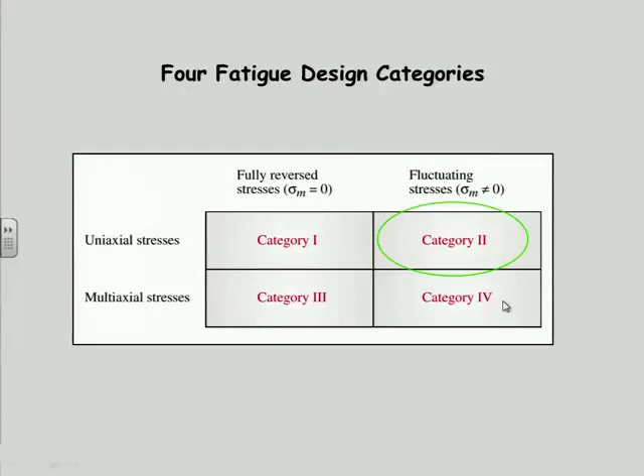When I have something other than fully reversed stress in a fatigue situation, then I will have a value of mean stress, a non-zero mean stress. There's lots of test data that show that the combination of both alternating and mean stress is more dangerous and debilitating to the material than just the fully reversed stress itself. And that's bad enough, because we've already discovered that your allowable strength, the usable strength of a material, is on the order of a fourth to a third of its advertised ultimate tensile strength. And when we get through with all the factors for endurance strength, we find we're down around 25 to 30% of the number we started with.

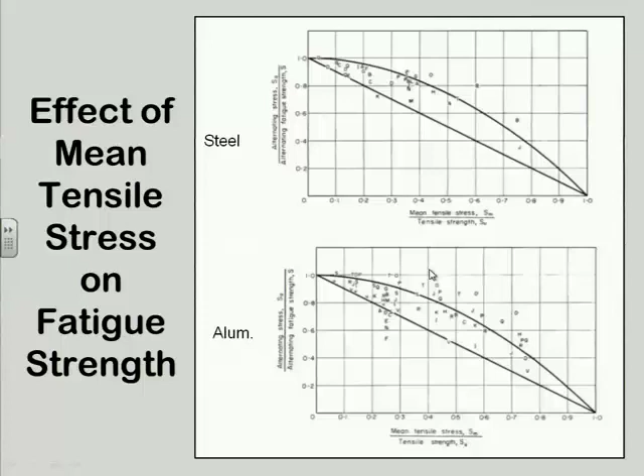Now, we've talked before about the positive effect of compressive residual stress on the fatigue case, because it tends to close the cracks. It raises the threshold, we have to get the tensile up above that threshold before it really is seen by the part, and all that good stuff.

This now shows test data, actual test failure points for aluminum and steel both. There's supposed to be a difference in appearance, but I don't see it. Aluminum, they both are circles. I think one is supposed to be a fatter line, but it doesn't show up very well on this plot. So some of these are aluminum, some are steel, all mixed in together.

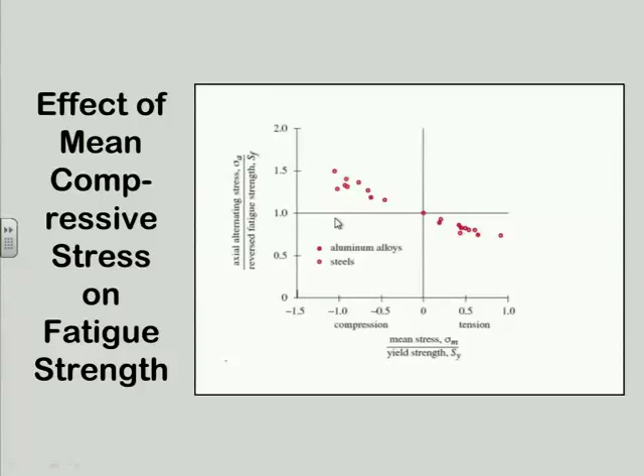So you could continue that Goodman line back into the compressive regime, because you might have mean compressive stress, and you might even have some alternating compressive stress in a given situation. But because engineers are inherently conservative, we don't take advantage of that, and we run the line across at the endurance limit. That'll come up in another slide in a moment, too.

So this shows the Gerber parabola that we just saw sitting on a bunch of test data. The Goodman line is pretty much underneath most of those breakpoints. There were a few that were below the Goodman line. In the aluminum, there were quite a few, in fact, which is again why we have to use safety factors.

Mr. Soderberg must have been extremely conservative, because note that the Goodman line simply connects the fatigue strength or the endurance strength, and whether it's endurance strength or fatigue strength is dictated by the type of material. We don't talk about an endurance strength for aluminum, because it never levels out, so we talk about its fatigue strength, using the subscript F for that. And if you're talking about a lifetime less than 1 million cycles, say only requiring the thing to last 100,000 cycles, then you could back up the SN diagram and get a larger value for fatigue strength than the endurance strength, because they don't care about going to 1 million cycles. So that's the difference between the E and the F.

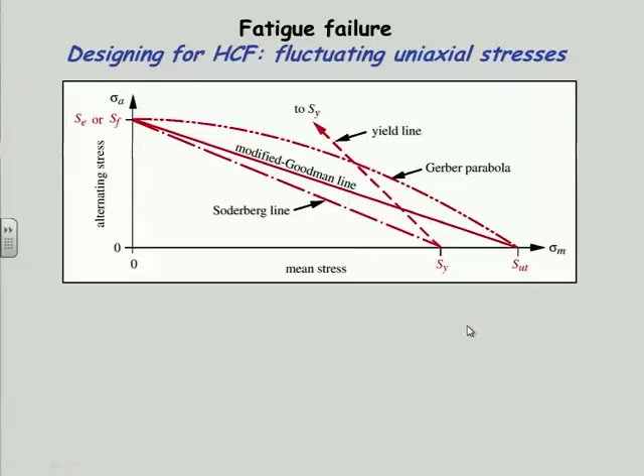There weren't as many data available that long ago on this phenomenon. So I think nowadays the Goodman line is sort of it. But you can use any one of them, and you'll find different books will stress different ones.

We can write equations for these lines very easily. I mean, you know how a parabola is just a squared term equation. This is in terms of alternating strength, S sub A, just a generic term for alternating strength—a stand-in for either S sub F or S sub E. It's just a generalized alternating strength.

Endurance limit times 1 minus sigma m squared. Now sigma would be your applied stress level in the mean direction, divided by sigma ut squared, that's the ultimate tensile strength. And that fits the experimental data very well.

The Goodman line is a linear line, so it's the first power, a similar expression: 1 minus sigma m over sigma ut. And the Soderberg line puts sigma y in instead of sigma ut. So we can use any one of those three as our reference.

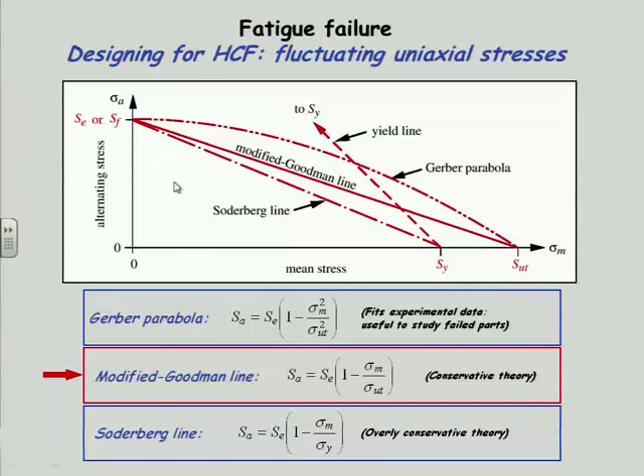Before I leave that slide: if my combination of alternating stress and mean stress is within these envelopes, whichever one you want to pick, then you say that's safe. Because when you reach the line, that's defined as failure for the Soderberg theory, the Goodman theory, or the Gerber theory. So on or outside the line is failure. You want to try to keep your stresses inside by some comfort factor, which is our safety factor.

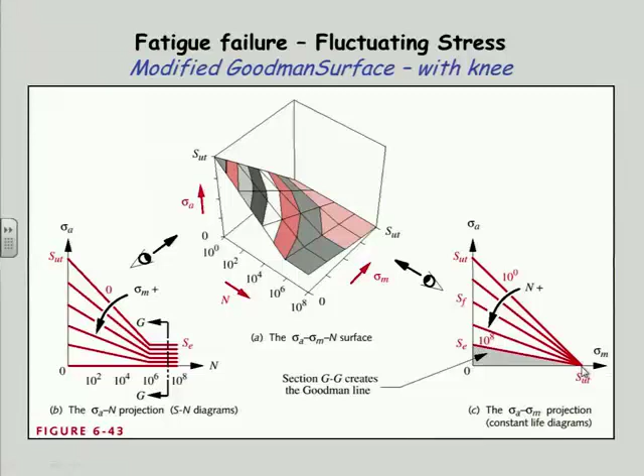The data shows that it continues more or less at the same slope back into the compressive regime, but we, being conservative, say we'll just level that off. And we could have yielding in the compressive direction as well, so that puts a limit there. And here's our Goodman line going off to SUT from the endurance or fatigue strength. So the gray area is our safe zone.

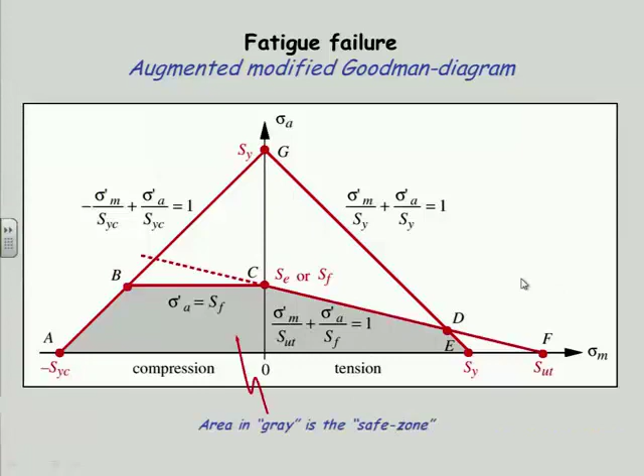And again, we're going to have to calculate a value for sigma A and sigma M separately—same equations, but you'll have different forces, because you may have a different value for alternating and mean in a given case. And find out where we are in this gray area here. And then we will determine a safety factor based on the relationship to that line.

Now we have to deal with stress concentration again, and it becomes a little more complicated when we add in the mean stress. Let me hark back to something I said when we started talking about static stresses, because it's applicable here too. It's generally believed that if you have only static loading and ductile materials, you can pretty much ignore stress concentrations because they self-correct.

Locally in the notch, the material will yield. And when it yields, the stress comes down to the yield stress. It can't go above it anymore because the material has moved, it has taken a set locally. So it's somewhat self-healing. If I only put that static load on once, the first time I put the load on, the thing yields, and it no longer hurts. If I do nothing else except leave that load on, I should be okay.

But if I start to cycle that load, that's a whole new can of worms. Now I'm going to have to worry about that stress concentration, even though the material is ductile. So in this new situation with fluctuating stress, we have both mean loads and alternating loads.

If you want to be really conservative, you could calculate the stress concentration factor like we did in the last round of discussion. We take the K sub T out of one of Peterson's tables, like you did on the quiz yesterday, and factor that down based on the notch sensitivity of the material. If the material isn't very sensitive to notch, I can reduce that number a little bit. I call that K sub F, the fatigue stress concentration factor.

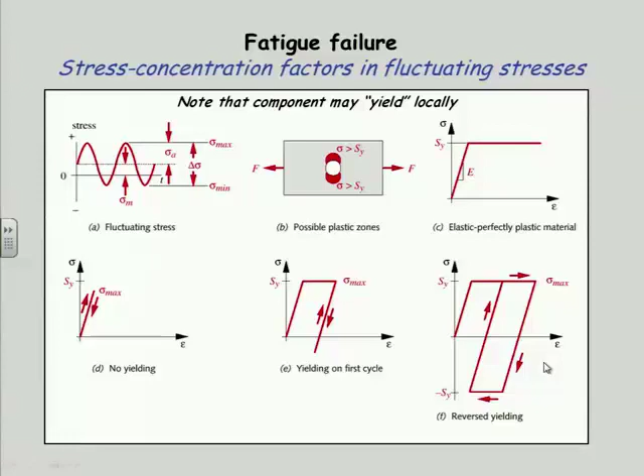And if I plot these three regimes, this axis is the maximum value of stress. And right here, this dotted line represents the value of SY divided by KF. We're going to apply the KF to the calculation because we have the stress. We know we have a stress concentration, and I want to know, does that stress in the stress concentration yield the part locally? So I'm going to multiply the maximum stress by K sub F and compare that to the yield strength. Did I yield at the end of the crack? That's the question.

If I don't, then I'm going to use the full KF for KFM because I never yielded. But if I start to yield it, then I'm going to work this down until I get to twice SY, which means that I'm exceeding it at both ends—I now in effect have a fully reversed case, and I'll knock it down to zero.

So while I'm in this regime here, Dowling, I think, came up with this equation. I'm not sure if it's original with him, but I first encountered it in his work, so I'll give him credit. We take the yield strength and we look at the alternating stress and the absolute value of the mean stress, multiply that by K sub F, and that will become our K sub FM.

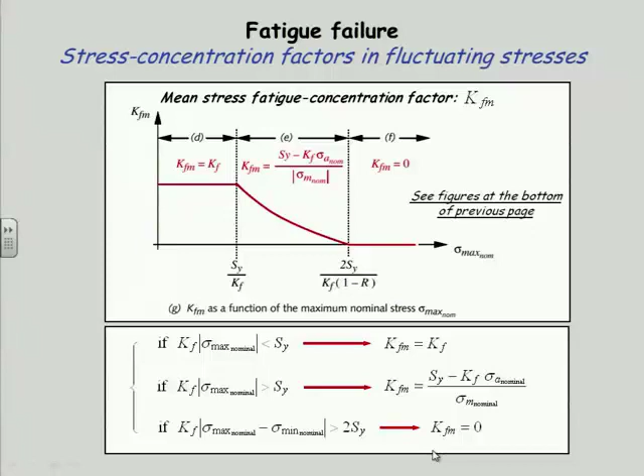So this is just a summation of what I said. If Kf times the maximum nominal stress is less than Sy, I use the entire amount of K sub f for Kfm. If it's greater than Sy, then I have yielded locally in the notch, and I use this funny formula. And if it's greater than 2 times Sy, then I say I've clipped it on top and bottom, and my mean stress is effectively gone.

So now the question is, how do we figure out a safety factor? I hope you understand that we have this envelope, right? From your side, alternating stress here, mean stress here, Goodman line coming down, yield line over in the corner. Goodman line is the primary one, and we're at some point in there, some sigma A, some sigma M. We're sitting someplace in the gray zone, so we're safe. How safe are we is the question.

Well, it turns out there are 4 possibilities. I call them case 1 through 4. And which one you have depends upon predicting the future.

Today I have a certain load scheme on this device. Let's talk in terms of load. I have an alternating load of 500 pounds, and it's sitting on a mean load of 300 pounds. So it's going to go from the mean, from 300 up to 800, and then back down to minus 200, and then up to 800 again, minus 200, 800, all day long. If that never changes over time, no one comes along and throws more dirt in the truck, or drives faster than I thought they were going to drive, or whatever. If nothing changes, then I'm fine. I just calculate the safety factor as if that ratio stayed the same forever. In other words, the 500 over the 300 is never going to be any different.

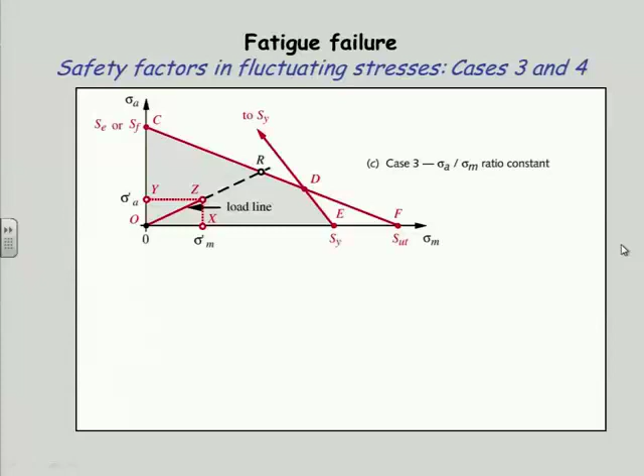Okay? These case 1s and case 2s, I don't think are very common. Not in my experience, anyway. Doesn't mean they don't exist. This is the one that in my world, where I'm dealing with machinery that sits on a factory floor and runs at a certain speed all day long, is the most common in my world.

Because they may come along and jack up the speed, but that will tend to lift both of them up by the same amount. And so now I'm going to go out on a dotted line that's just an extension of the line that gets me from the corner to my point. And so now my safety factor is RO divided by ZO. And we can write expressions for those, so we know the equations of the lines and so forth, right? So it's just the intersection. R is at the intersection of this line called the load line and this line called the Goodman line. If I write the equations for those two lines, solve them simultaneously, I get the intersection, and that's my equation, which we'll see in a second.

What I call case 4 is the general case in which I say, I have no idea what's going to happen in the future with these loads. The alternating may increase and the mean may increase also, but not in the same ratio. I have no data, no way to know what someone's going to do to this assembly when it's out there in the world. I think this is probably most realistic with any kind of vehicle, because you don't know what they're going to do with the vehicle.

So here I want to find what's the shortest way out. The shortest way out of the envelope can be found by taking your compass, setting it there, and increasing the radius and drawing arcs until you find an arc that's tangent to the envelope. That's the shortest distance out to the envelope.

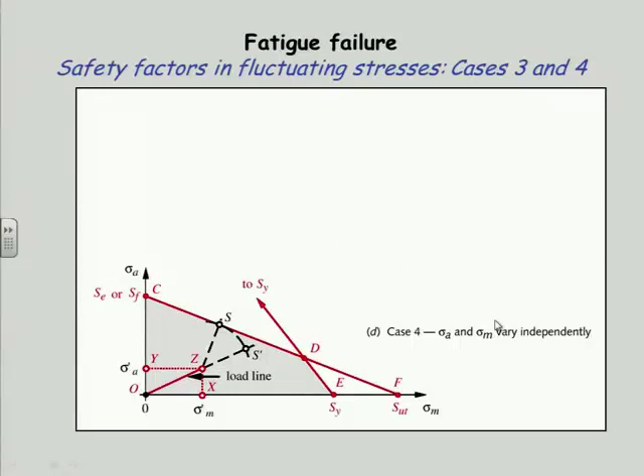So I didn't show you the formulas here, but they're in the book. As I said, they just come up. This was a little more complicated because I got to figure out what that radius is out to the line and so forth. It's just geometry. So they were derived using plane geometry. And we'll see them in the example that I'm going to go through now.

So this is example 6.5, which is building upon 6.4. And I walked you through 6.4 the other day, where 6.4 dealt with fully reversed stress on this same part. Now I've changed the loading conditions for the part to a fluctuating stress. So I have a maximum of 1,100 pounds, minimum of 100, and mean of 600. I think it's pounds. Could be newtons.

And we looked at this beam the other day. I explained why I did this rather than just clamp a straight piece in the wall, because that gives me a stress concentration factor of 2.0. I can get lower than that by putting a generous radius in there, which is what I did that for. I got it down to 1.2 or something like that. Ranges from 1.1 to 1.5 for that case, according to Peterson.

So I'm going to start this analysis with the design I ended up with, same dimensions for the fully reversed. If you recall that, I picked some numbers out of a hat to start out. I think it was an inch wide and maybe it was an inch deep and inch and a half wide or something like that. And it turned out to have a safety factor less than 1. So I jacked the dimensions up a little bit, and I got it up to 2 point something or other, or 2.2 or something like that. Okay, so I'll start with those numbers, which are here someplace.

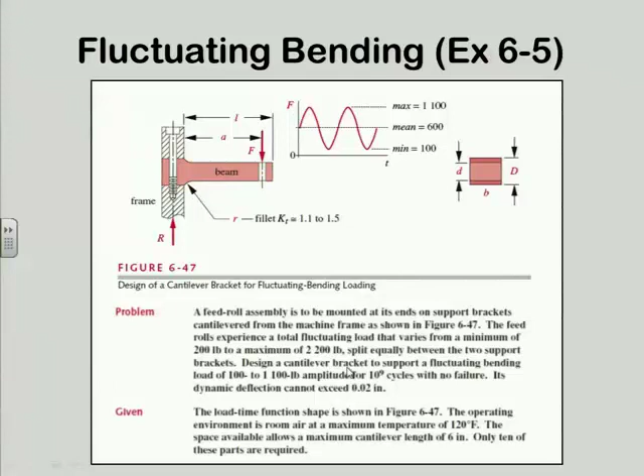I'm going to assume that I will use a medium carbon steel because it's nice and ductile. It's got an endurance limit, has a knee, and it's pretty low notch sensitivity, so that's a good choice for this particular case. If I don't need the hardness for wear, then I typically will not go up into the high hardness regime because I'm going to lose ductility. I'll pick up a lot of strength. The ultimate tensile strength goes way up, but I lose ductility and I pick up notch sensitivity. So I sort of chase my tail a little bit in the fatigue department by going to higher strength steels.

Where I have to do that is where I have rubbing contact or rolling contact between materials. Ball bearings, a good example. Those are made as hard as you can make the steel, because otherwise they're going to wear out in a hurry.

Luckily, a lot of the loads, the stresses in those are compressive, so it's not such a big deal. But there's plenty of other applications. Any machinery where things are rubbing on one another, cams, gears, those are usually made hard if they have high loads.

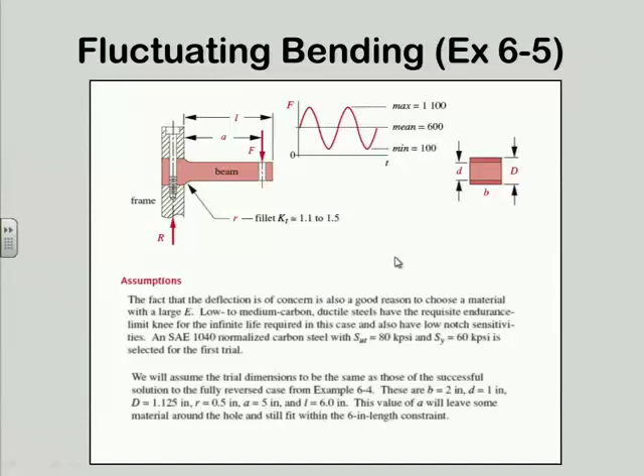But this one is just a bracket of some sort. It's holding up some kind of a roll, I said here somewhere. So here's the numbers that we ended up with before: 2 inches wide, 1 inch deep. Big D, which is the piece in the wall, is 1 1/8 inch. Half-inch radius in the notch. Distance A is 5 inches and distance L is 6 inches. So that's where we ended up with the fully reversed case before.

So I start off by finding out what my components are for the mean and the alternating. In essence, what I'm going to end up doing with this fluctuating case is have two almost identical stress analysis computations. The equations are typically going to be the same because the loads and cross sections are the same in both cases, and the loads are in the same direction in both cases. I just have a different value. So I've got a value of 600 for the mean and 500 for the alternating. I set the same set of equations up for both, just change the numbers. I'm doing it in a spreadsheet, MathCAD, MATLAB, TK Solver, whatever — it's very simple to do.

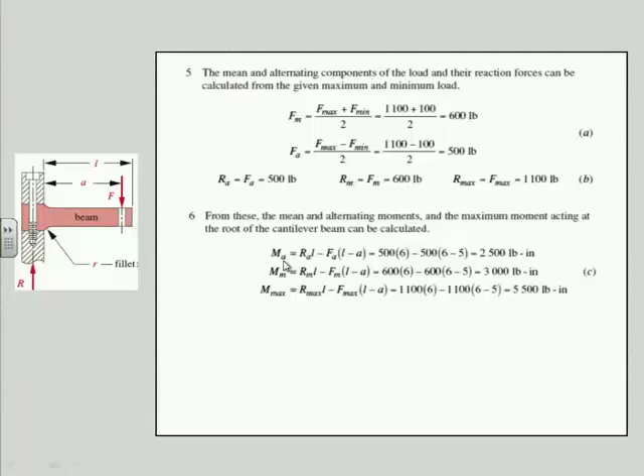So we find the reaction forces and so forth. We've got to find the moments. We use a standard beam analysis to get the moments, and we find we get 2,500 pound-inches of moment alternating. The moment's going to look the same, right? So the force does this, the moment's going to do that too — it's just a force times the length. The mean moment is 3,000 pound-inches, and we're going to need the maximum moment because we want to get a maximum stress, and that's 5,500 pound-inches.

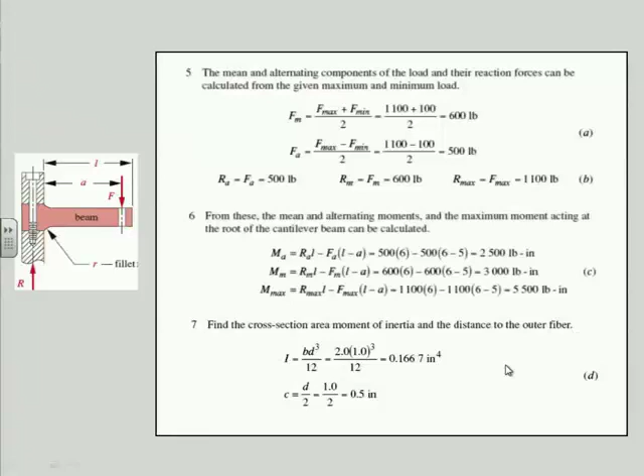We calculate the cross-sectional properties. This is a beam in bending, so I need the I, not the J — the J is for torsion. And that's, in this case, BH cubed over 12, since it's a rectangle, so I get that number. C is the distance from the neutral axis to the outside surface, which is just half of the thickness in this case. So that's a half an inch with my assumed 1 inch.

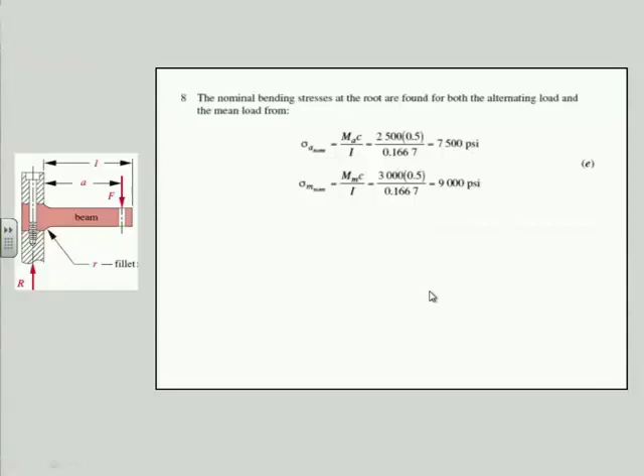And now I find the nominal bending stresses at the root of the cantilever in the notch. MC over I in both cases. The only difference is this is A's for subscripts and this is M's for subscripts, and the numbers are different. So I get 7,500 and 9,000 psi respectively for those two values.

And now we have to deal with the stress concentration business. For that I need to go to one of Peterson's tables, many of which are in the back of your book. For those I typically need a couple of ratios: the difference in the dimension from the fat part to the skinny part, that's the D over D, and the ratio of the radius to the skinny part, R over D. Calculate those ratios. This happens to be the one Peterson chart I pulled into the chapter 4 as an example, figure 436. It's also in Appendix C.

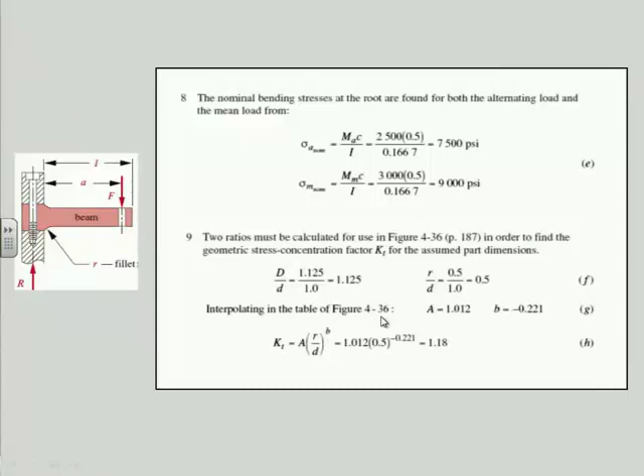Appendix E in the previous edition, Appendix C in this one. In that chart, I don't happen to have an entry for 1.125 for the D over D, so I interpolate between the two neighboring values in the chart, and I get 1.02, or 12 rather, for the A coefficient, and I interpolate to get this 0.221, put it in my fitted curve, and out pops 1.18 — not too bad, a nice big radius, so I've got a fairly low stress concentration. Now that's K sub T, the so-called geometric stress concentration factor, which is what we would use for a static case. Just stop right there. But this is a fatigue case, and I want every little bit I can get.

That K sub T is going to give me a smaller safety factor than this K sub F will, because I'm going to downrate this now since the material I picked isn't all that sensitive to notches. So I can afford to reduce this a little bit, and that's where the Q comes in.

So I go to the tables, the so-called Neuber factors, right here, table 6.6. These page numbers are third edition numbers, so it's going to be a little bit higher in your fourth edition.

I go into his table for a material with an SUT of 80,000 psi, which is this particular material, and he tells me the square root of A is 0.08. I use that and the R of the notch, the radius of the notch, to calculate a Q factor of roughly 90%. So I'm going to get a 10% down rating of that 1.18. Not a hell of a lot, but I'll take whatever I can get.

And it brings me down to 1.16. I probably could have ignored it and wouldn't have been much different. But we try to get as accurate as we can.

So now I'm ready to use this K sub f and its cousin K sub fm, which I haven't yet figured out, to bump up the nominal stresses to represent what they are locally in the notch.

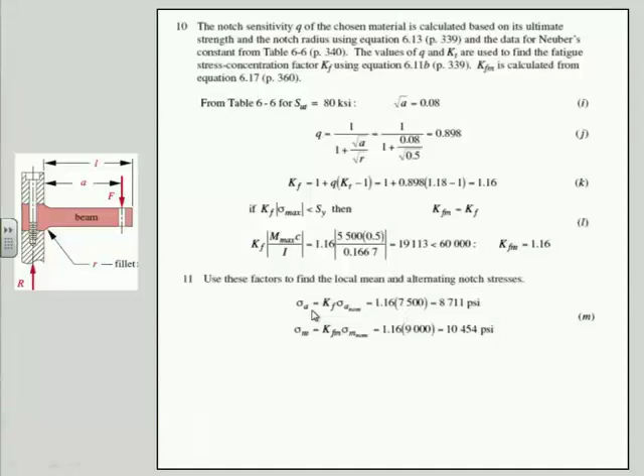And where did I get the KFM? Well, I skipped over it. Here's right here, I didn't even notice it. Here's the KFM right here, and there's the KF. So down to there, down to K is the KF, the 1.16. My eye jumped down to here, and I thought I had done it.

So here we have to ask ourselves if this KF times the maximum stress that I happen to have, using the 5,500 moment, is less than SY, then I'm going to use the whole value of KF. So I do that calculation: take the KF, which I just figured out at 1.16, take the maximum moment, which was 5,500 inch-pounds, multiply by the C, divide by the I, and get 19,000 and change.

My SY for this material is 60,000, so I'm never going to yield in the notch. I think that's a good thing. I really don't want to yield the notch. I'd much rather be below the yield point in the notch, because then I'm not going to start growing cracks. So I'm happy with that, but it says I better put the whole K sub f on the mean stress.

Oh, big deal, it's only 1.16. So we multiply the 1.16 by that again, and we get that. So now I've got what purport to be good estimates of the stresses in the notch, both mean and alternating.

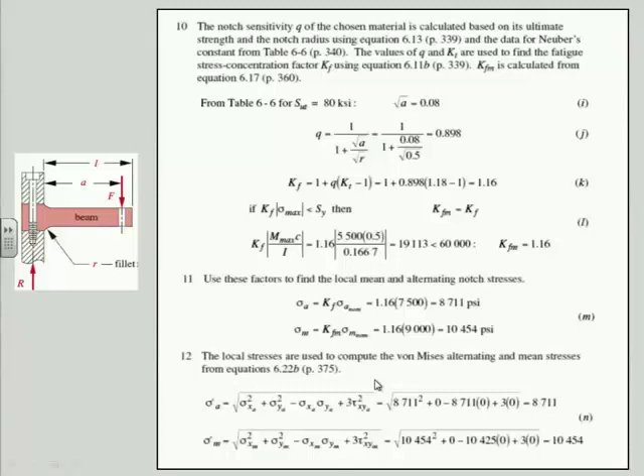Now I got to look at my material and get the endurance limit. So we go through the usual rigmarole: take half of the SUT, that's 40 grand. I don't have a round part, so I got to use a trick to relate this rectangular thing to a round part.

The trick says take the area that's subjected to 95% to 100% of the stress in the cross section, which is just the outer rim of the top and bottom. We only care about the tension side anyway, which would be the top in this case.

So 0.05 is 5%. D is the height, that was the 1 inch, and B is the width. So I'm taking 5% of the height times the width. That's a little strip of area across the top, and I'm finding out that's worth 1/10 of a square inch.

And then I put it into that formula, which is simply converting it to a donut that has that same area. So it's an analogous round thing that I can compare to my test specimen, which is 3/10 of an inch. So I can use that to determine a size factor, C size, which turns out to be 0.859 here. I give you the equation references, I didn't write them out.

So C load is equation 6.7a, and that has only two values: for bending use 1, and for axial use 0.7, I think it is. This is bending, so it's 1. And then the C size factor, as we just discussed, that's coming out of this equation that I get to approximate at 0.859.

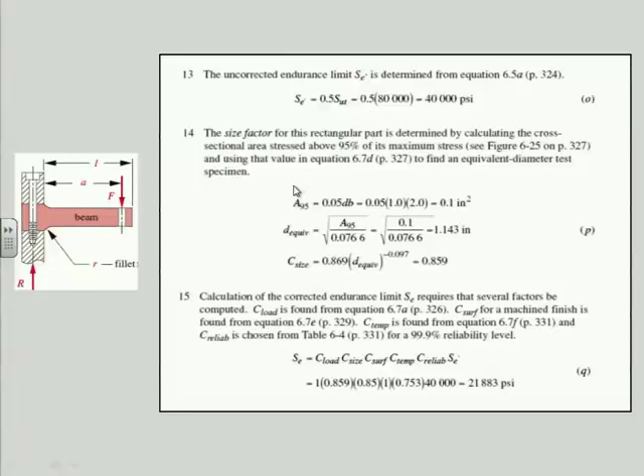So now I have to figure out my safety factors. I'm using case 3 here, which assumes the alternating and mean components will have a constant ratio. In the interest of space, I didn't show all the others in the example, but in my spreadsheet, my TK solver file, I calculated all 4 of them.

So this is the equation for the intersection of two lines. SE and SUT, of course, are the two intercepts of the Goodman line. It starts at S sub E on the alternating axis, goes down to SUT. So that represents that line. It also shows up in the denominator.

And sigma prime A, that's the point where I am on the diagram — that's my alternating stress, how high up I am on the vertical axis. And sigma m prime is how far to the right I am on that mean stress axis, and it turns out to be 1.9. That's good, it's close to 2. I think that'll be acceptable.

I'll give you a couple of tables full of data that are right out of the TK file, so you can see all the intermediate numbers.

And I say, well, 1.9 is okay, but I could probably do better. So I go in there and I calculate the deflection at 12 thousandths of an inch, which I guess was within the spec. And I say, well, let's kick it up to... where do I see the number?

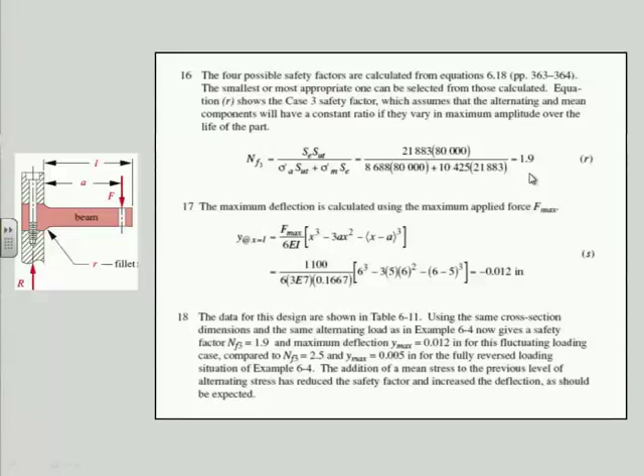Okay, so if I want to get back to the 2.5, it's easy enough to do. Just add a little meat to the pie here, and I crank up my little d, which was 1 inch — I make it 1.2 inches. Crank big D up to 1.4. I can buy a 1.5 inch piece of stock right off the shelf. I can machine that down, take a tenth of an inch off, clean both sides up to get a good clamp surface, machine the rest of it down to the 1.2, and I'm done.

So this shows you all 4 safety factors for this particular case. There's my stress state, sigma A prime and sigma mean prime. There's my S sub E, which is 22,000, coming down to 80,000 over here. There's my 60,000 worth of yield going up at 45 degrees. And if I had what I call case 1, I've got a safety factor of 8.6.

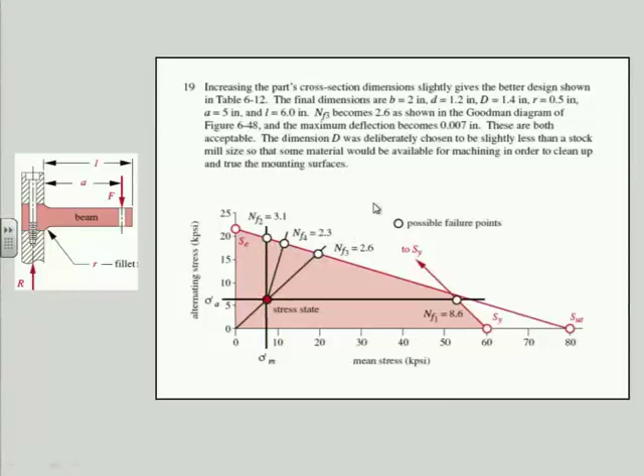If I had what I call case 2, I got 3.1. Case 3, I got 2.6. And the shortest way out of the envelope is 2.3. So they're all over 2, and I say that's fine. I'm happy with that. I'm not going to read this list to you — this is right out of the book.

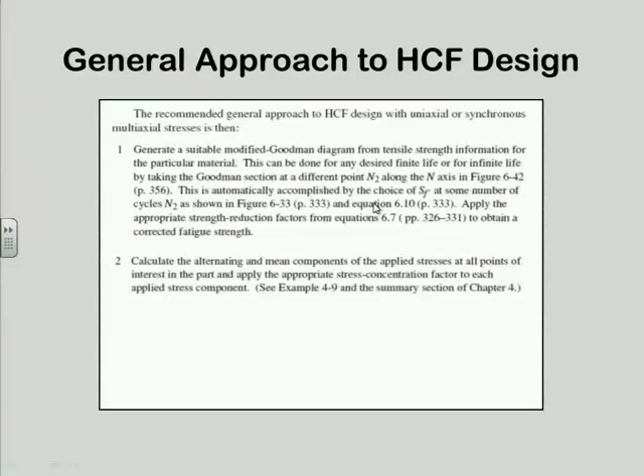But I give you a set of steps. They're pretty commonsensical — you could actually start almost anywhere in this list. I've got to get the material strength, so I've got that as the first step. I'm going to get my modified Goodman diagram for the material I picked. Then I'm going to calculate the two sets of stresses, the mean and the alternating, and convert to von Mises. After I put the stress concentration on first and then do the von Mises.

Just do the von Mises once. So jack them up by the stress concentrations as appropriate, then convert them to von Mises. And then plot your alternating and mean on that Goodman diagram and figure out the safety factor, or all four. And you're done. This is the general case.

And because it's general and incorporates all the others, you can use this all the time for anything. In other words, fully reversed is satisfied by the Goodman line — it just happens to be over on the alternating axis, right? I don't have to draw the line because I never go off in the mean direction. So I could actually use the same spreadsheet for every case I ever run into and just set the mean stress to 0, and I've got it fully reversed.

And if I have the so-called repeated case, which is fairly common — meaning it goes from 0 to something back to 0, like this all day long — then the mean is equal to the alternating. Well, that's just different numbers in the same spreadsheet. So I have done that, just what I said. And on your disk, there are examples. Every example in the book is there as TK Solver, MathCAD, MATLAB, and Excel.

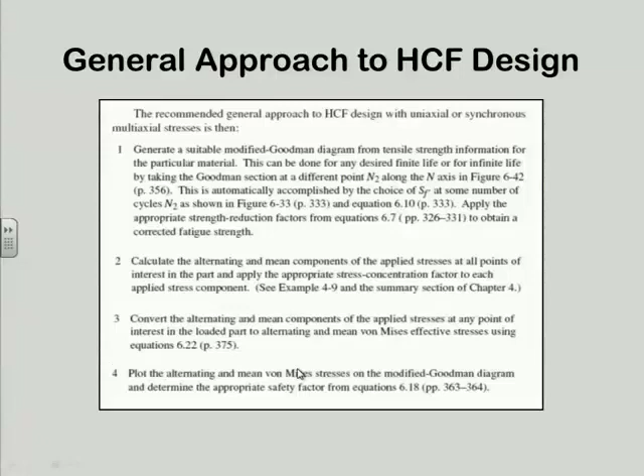And what I'm suggesting you do is go onto your disk with the book and get the example for this 6.6, and go in and monkey the numbers around to match this and see what you get. So that'll help you see how to put a program like that together, and you can modify it to do a different problem and so forth and so on. That's kind of an exercise, not a really homework problem, nothing to pass in.